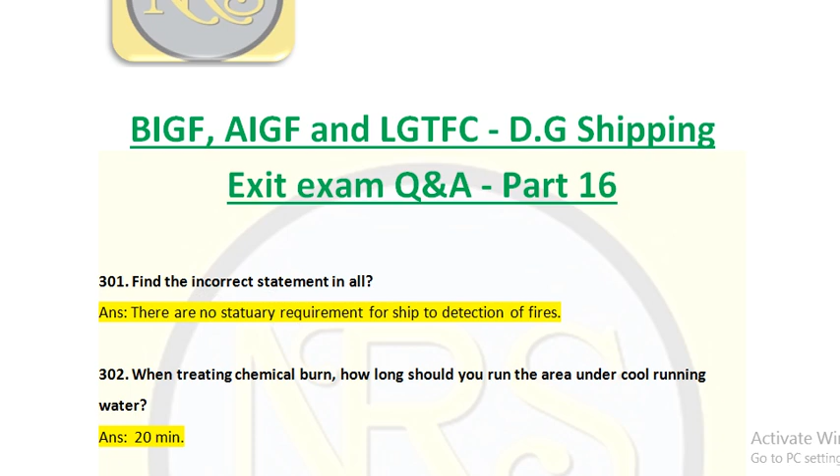Watchkeeping has to be carried out at that location. So this is a statutory requirement. So this sentence is incorrect.

Question number 302. When treating a chemical burn, how long should you run the area under cool running water? Answer: 20 minutes. You have to run water over the place where you got burned. For a first degree burn, you have to run it under water for a period of 20 minutes continuously. Cool down process.

Question number 303. The way to depend on your fire detection system will be. Answer: unacceptable, and one must be prepared for fire and have fire detection and firefighting system on board. So you should not always believe the fire detection system, as it is an electronic system, even if the reliability and redundancy is 100%.

You always prepare for fire and have fire detection and firefighting system on board. There should be a firefighting system and a person should be prepared to handle the fire, how to operate the system, what action to be done. Training has to be given for that. That is what question number 303 is trying to say.

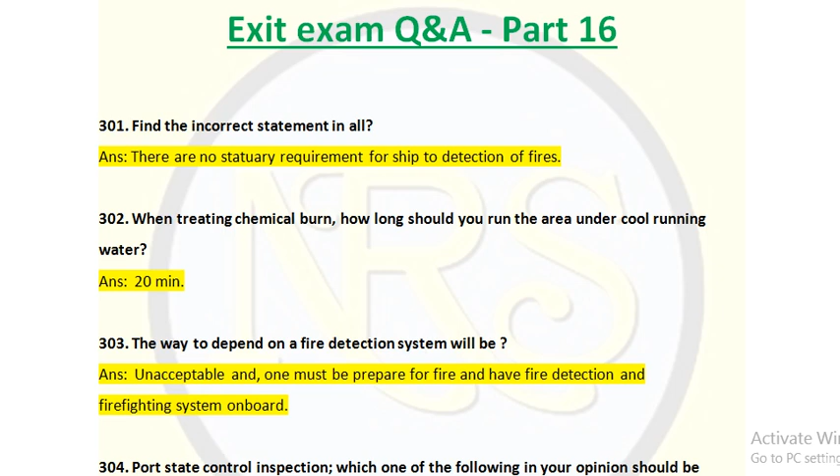Question number 304. Port state control inspection. Which one of the following in your opinion should be the most serious indication of the lack of onboard training? Answer: using inappropriate span gas on the sensor. That is the answer.

If you are using the wrong span gas for the sensor, or you don't know which span gas to use, and you don't know the expiry date of the span gas and when it was last calibrated, these things will show that the person has poor training, lack of knowledge. So this is the answer for question number 304.

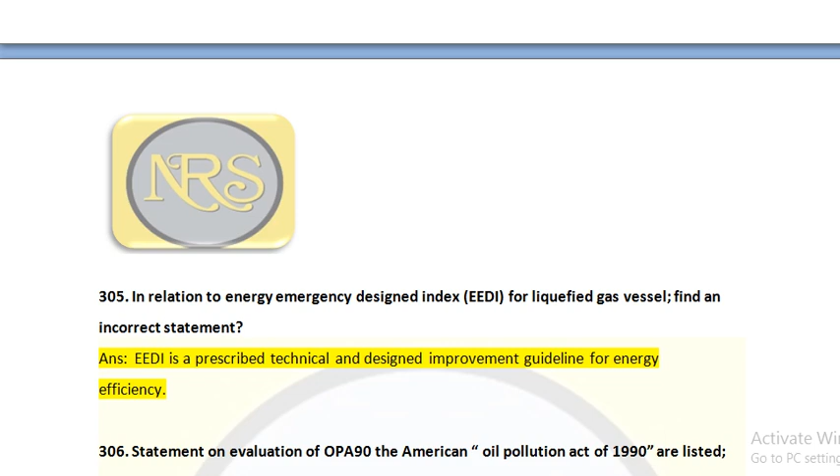Question number 305. In relation to Energy Efficiency Design Index EEDI for liquefied gas vessels, find an incorrect statement. Answer: EEDI is a prescribed technical and design improvement guideline for energy efficiency. So EEDI is a design index.

This has to be made at the time of design. It's not a guideline. Okay. It talks only about the design factors, not the technical part. So this is the incorrect statement.

Question number 307. Issue of greenhouse gases. Identify an incorrect statement. Answer: ship energy efficiency management plan is just a best practice and not a mandatory regulation requirement. This is an incorrect statement because if you see regulation 22, ship energy efficiency management plan, each ship shall keep on board a ship specific ship energy efficiency management plan.

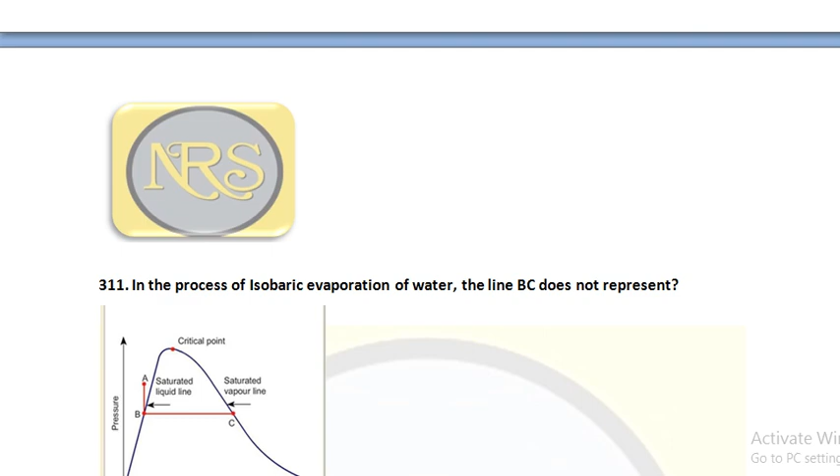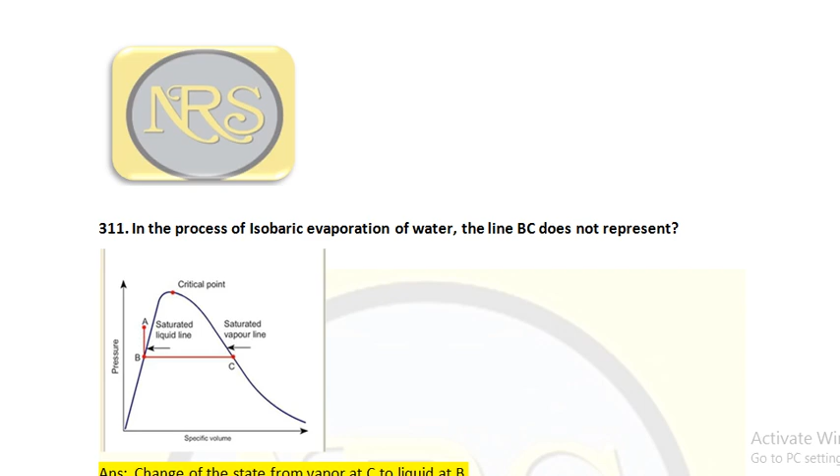Question number 311. In the process of isobaric evaporation of water, the line BC does not represent. Remember this drawing we already discussed in my previous videos. Please refer to it. Here it is telling C to B, this process; which sentence is wrong? Answer is change of state from vapor at C to liquid at B. That is telling the change of state from vapor to liquid, C to B.

That is what it is explaining. Like that they are telling, but that sentence is wrong. That is the answer for question number 311.

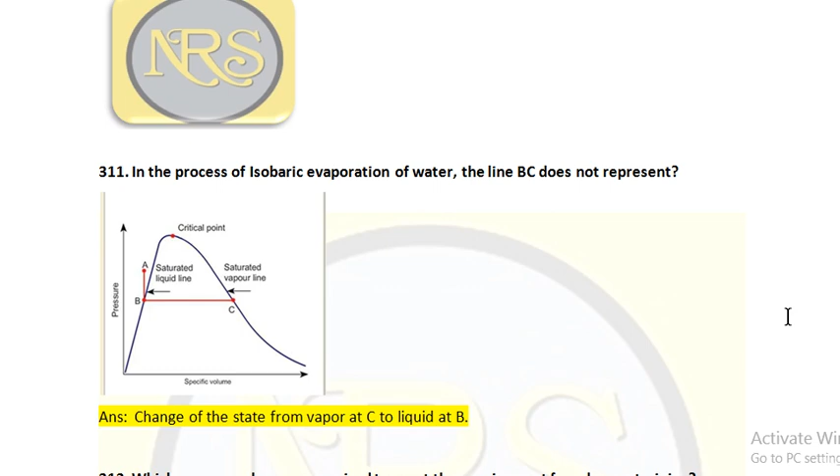Question number 312. Which of the crew members are required to meet the requirement for advanced training? Answer: master, engine officers, and those with immediate responsibility. This is an IGF Code requirement. Advanced training is required for the master, all engine officers, and whoever is directly responsible. It can be the chief officer also in some cases. So it depends, again, on your company SMS policy.

Question number 313. Which bunkering operation is least hazardous? Answer is portable tank transfer. Because with the portable tank, you are changing the tank and you are not doing a bunker operation like your normal LNG bunkering. So this is least hazardous. We are not saying not hazardous, we are saying least hazardous. This is the answer.

Question number 314. First aid measures will not include in MSDS. Answer: details of any medical treatment needed as a follow-up from first aid. This is not mentioned in the MSDS. They will tell only about first aid; they will not tell what follow-up medical treatment has to be given by the physician or doctor. So that is the answer for question 314.

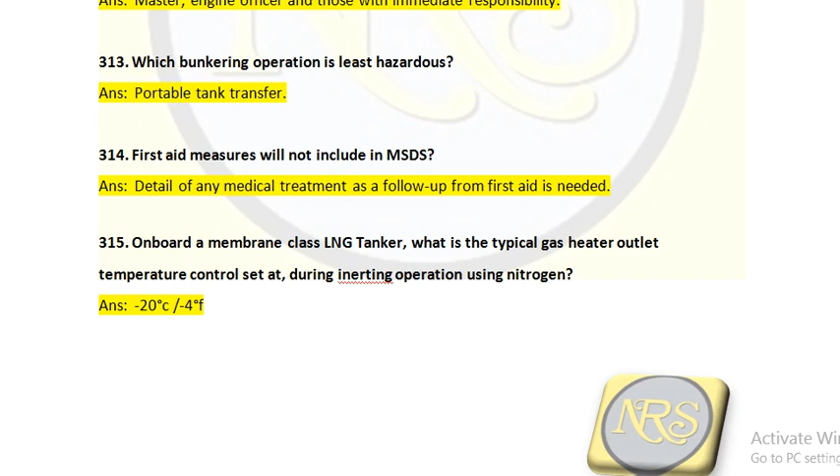Question number 315. On board a membrane class LNG tanker, what is the typical gas heater outlet temperature control set at during inerting operation using nitrogen? Answer is minus 20 degrees Celsius, or minus 4 degrees Fahrenheit. So the heater outlet temperature using nitrogen should be controlled at minus 20 degrees Celsius. The correct answer.

Question number 316. If a poisonous gas or material is swallowed, the membrane in the mouth absorbs it quickly. Answer is mucous membrane. The mucous membrane releases mucus solution. This membrane will prevent damage to the organs. The mucous membrane lines surfaces such as the tongue and mouth.

It will be present there, and it will prevent any hazardous compound or chemical you are taking from going directly and damaging your organs. First, it will be absorbed by it. So mucous membrane is the answer for question number 316.

Question number 317. What is the type of gas detection system fitted to monitor gas content of the insulating spaces? Answer is infrared type or sequential measurement method. The gas detectors we use are IR type, with the sequential measurement method for detection of gases. Question number 318. There are dash types of flammable limits. Answer is 2: upper flammable limit and lower flammable limit.

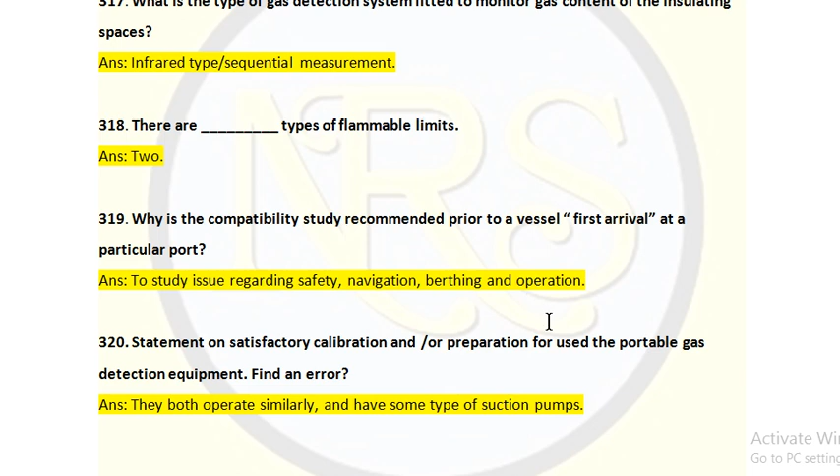at the port will be safe. It will not cause any danger or hazard to the port, port authorities and persons around it. That is why they carry out the compatibility study. That is the answer for question number 319. Question number 320. Statements on satisfactory calibration and/or preparation for use of portable gas detection equipment. Find an error. Answer: they both operate similarly and have some type of suction pump.